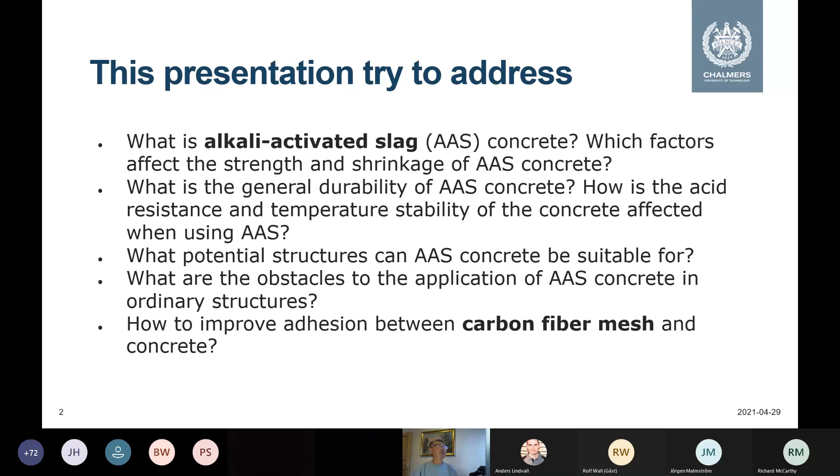So this is my outline of presentation today. First, we will look at the background. What is alkali-activated slag concrete?

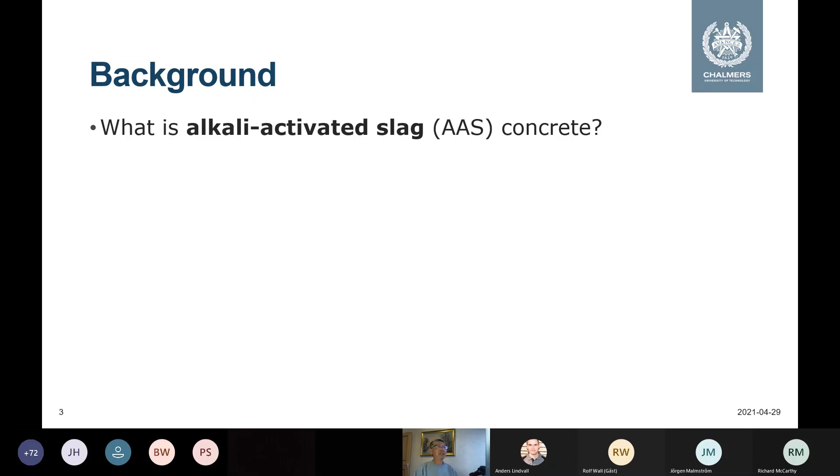In fact, we know that we have a problem with the carbon footprint in production of Portland cement. In our concrete, we have to use Portland cement, so that means we have to reduce the carbon footprint. This is our task in the near future.

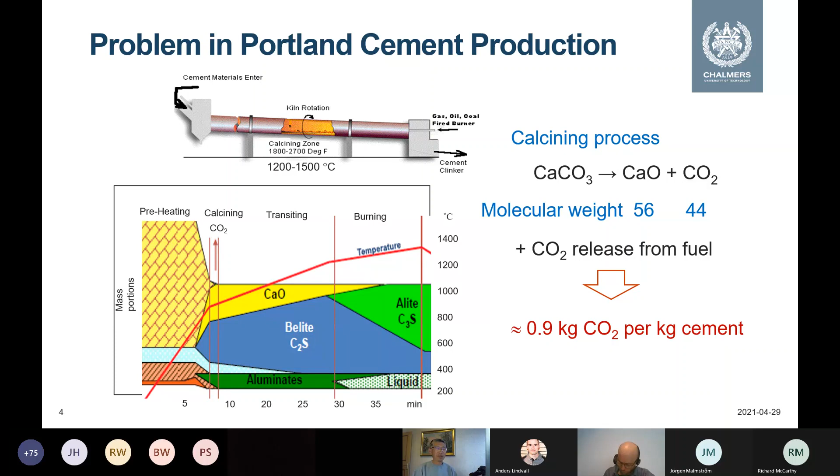In fact, alkali-activated materials historically, even from 1930, in Germany they have already started some alkali-activated slag. In the 50s, in the previous Soviet Union, they systematically studied alkali-activated slag. In France, in the 80s, they studied some geopolymer.

I think that is just a different mineral. When we use slag, that is alkali-activated slag, but when we use fly ash, that is geopolymer. So this is similar - in fact it also belongs to alkali-activated materials.

In Sweden, our Chalmers' first PhD student from building materials studied alkali-activated slag, by Tomas Kutti. I think he was Thomas Concrete Group's first manager of research and development. I think all of you know him. He is now 75 years old, but he contributed very much to alkali-activated slag.

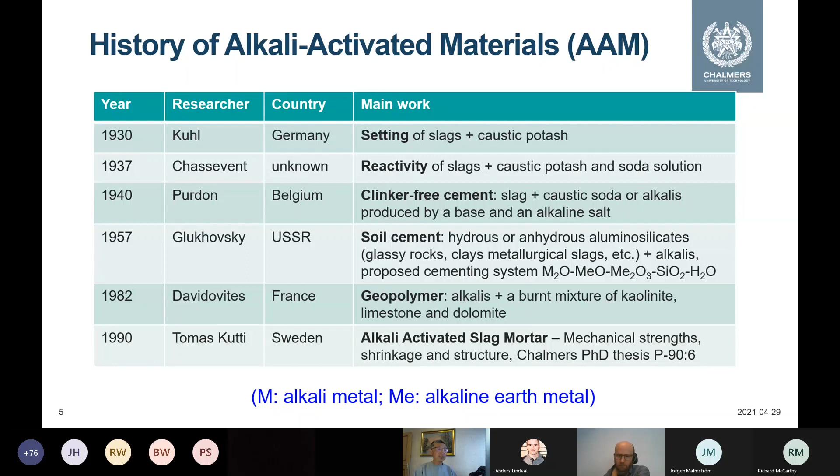After the year 2000, this became a very hot topic. You can see that after 2000 we already have 3 books about alkali-activated cement and concrete, or alkali-activated materials, and we even have a handbook of alkali-activated cement, mortar, and concrete.

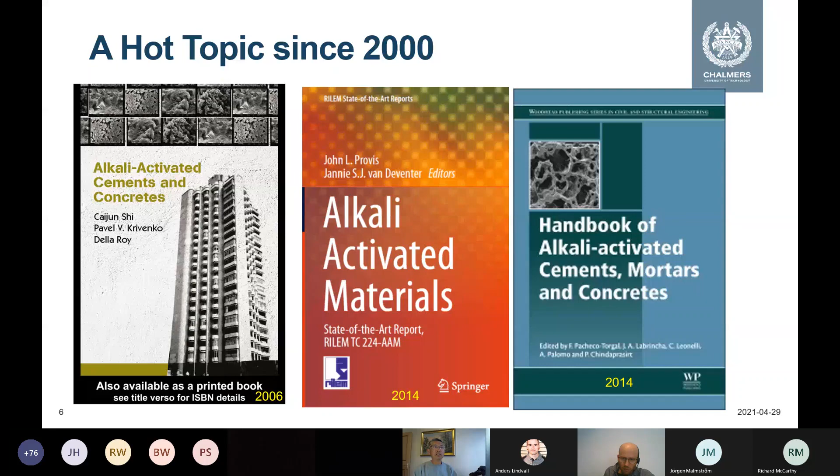There are also a number of buildings, in previous Russia or Ukraine, and in China - they already have buildings, but not yet in Western countries so far.

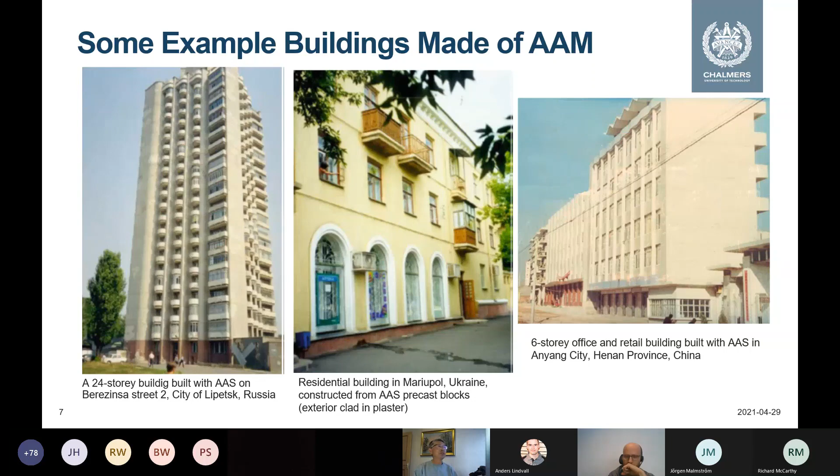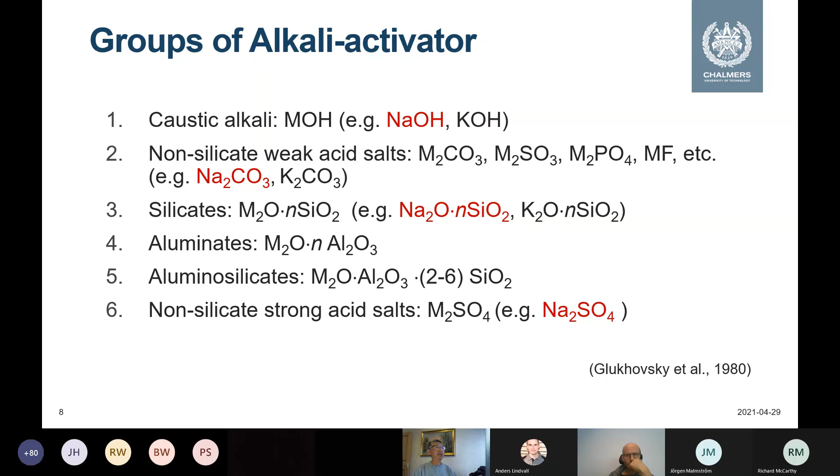I think that is also a relatively low carbon footprint. But the first problem is high shrinkage because of the low calcium-silicate ratio. And the second problem is the setting time. But nowadays I think we can control the setting time quite well, so I think the second is not a problem, but the first one is still a problem.

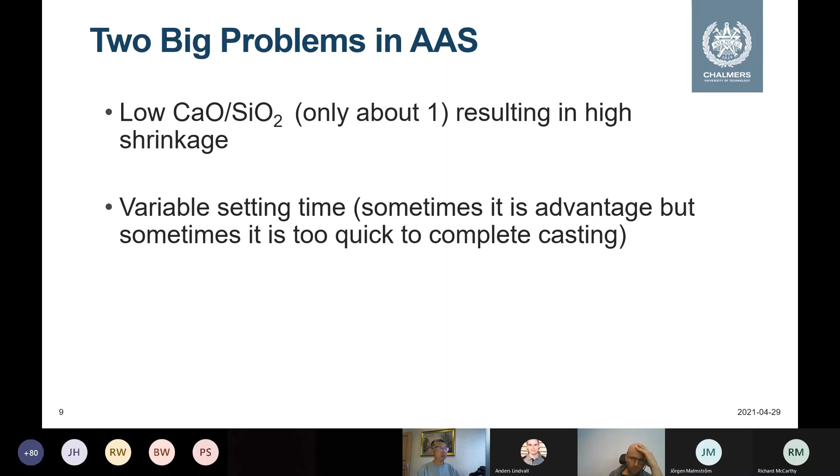This is the reason why we started a project with financial support from Vinnova in the past years. This year we finished the project, so this is why I want to present the results as a kind of implementation.

In this project, Chalmers is the leader. We have cooperators from Swerea, now RISE, Sicomp, and we also have a number of industrial partners in this project.

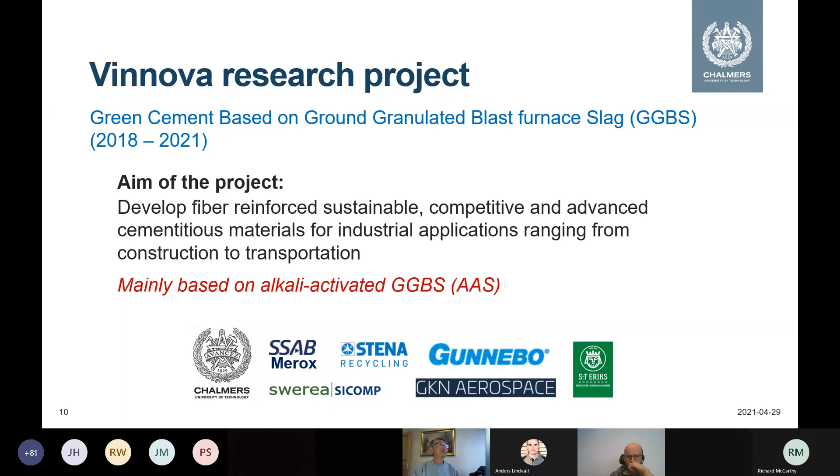Through the project, we found 3 very important parameters in proportioning of alkali-activated slag concretes. These factors include alkali content - basically sodium oxide content - and then silica content. We know that sodium oxide content is basically trying to increase the solubility of silicate.

In our slag and also cement, we have a lot of silicate, silicon oxide, but the solubility of silicon oxide is very low, so we need the alkali to dissolve it. Because this dissolution process is very slow, we need to increase the early strength. In that case we need to add silica content directly from water glass, at the molecular level. This is why we use water glass.

We also found another very important parameter: gypsum content. We use gypsum to decrease the shrinkage, and also use gypsum to increase the calcium content. So these are the double reasons for using gypsum.

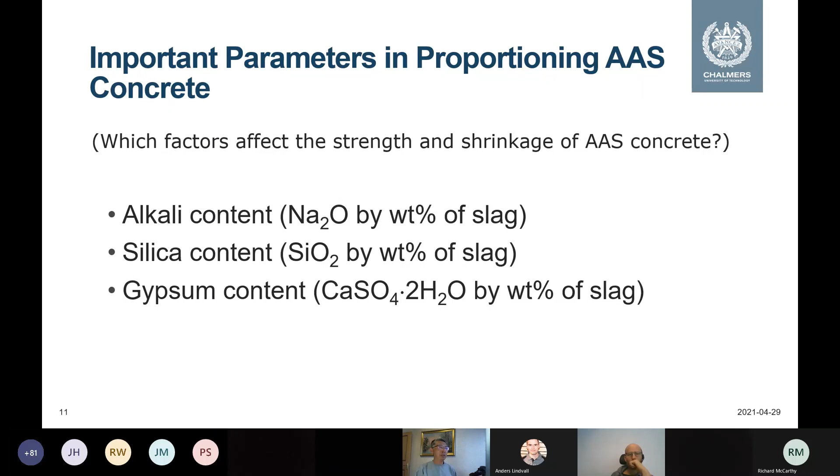So these 3 parameters we studied. You can see that by considering sodium oxide content, if we consider 4% to 6%, between this 4 and 6%, we can produce concrete more or less like ordinary Portland cement strength, compressive strength. You can see 3 days, 7 days, and 28 days, it is in this range. When we use, for instance, 5%, that exactly follows 3 days, 7 days, and 28 days. This is 90 days, also in the range. So you can see this is sodium alkali content, and on the other side, silicon oxide content or silicate content.

So you can see that if we have around 5% to 8% silicate content, at 1 day it is already here, 3 days, 7 days, 28 days, and 90 days. So you can see that if we increase the silicate content, we can increase the early strength. This is why we use both sodium content and silicate content to adjust our strength development.

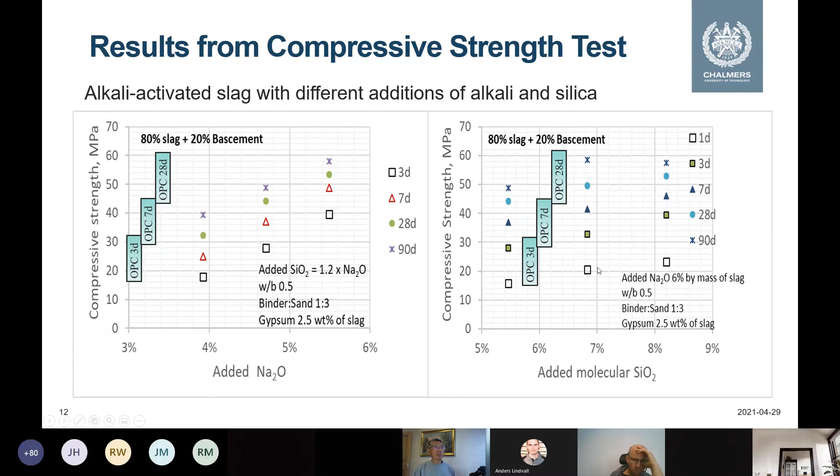Then we also found a very interesting relationship between this sodium content, silicate content, and gypsum content. This is 3 days strength, and we have a very good curve. We call it combined additions, with a very good correlation. And this is 7 days, 28 days, 90 days, and even 1 year results. You can see that the correlation is quite good.

This correlation we can express by this equation, combined addition. We take sodium content as 1, and then silicate content is 0.3, meaning the contribution to strength by silicate is only about 30% of alkali content. Gypsum is negative, about 30% negative contribution to the strength. We know gypsum has low strength, so it negatively contributes to strength, but positively contributes to shrinkage reduction. I will show later on.

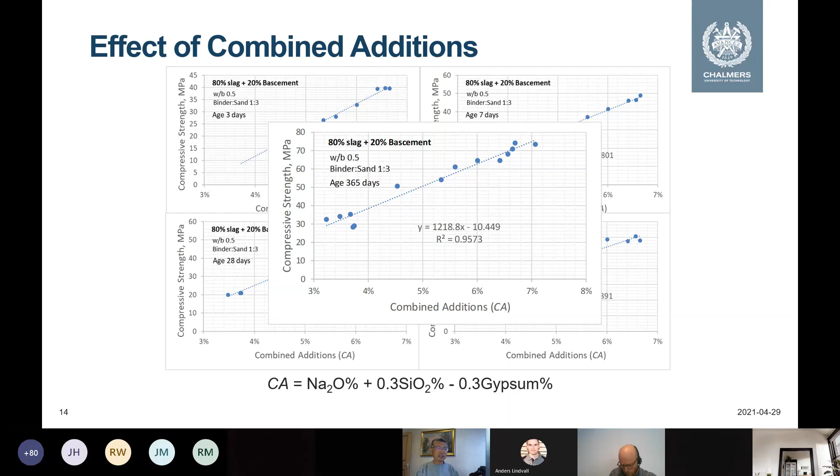So this is shrinkage. This is ordinary Portland cement shrinkage, here compared only with the mortar. I think the concrete has a similar tendency. From the mortar, you can see that ordinary Portland cement after 1 year is around 1% or 1 per mil, 0.1%. Then for pure alkali-activated slag, it is about 5 per mil. But if we...

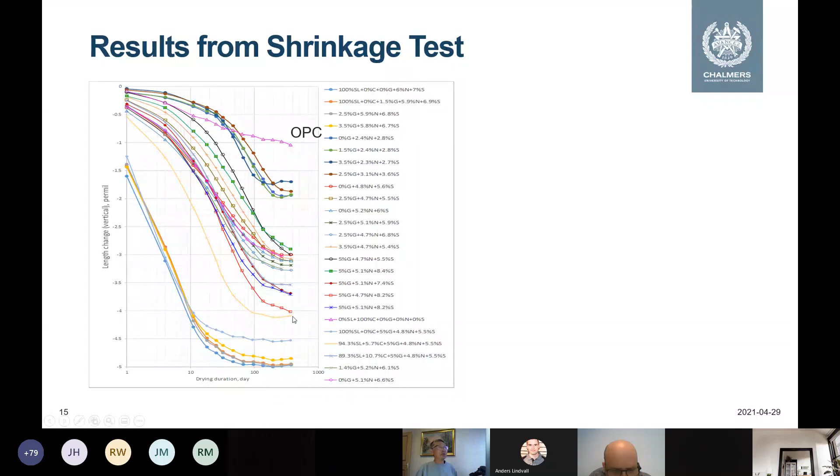Add gypsum into the alkali-activated slag, it will decrease the shrinkage. If we add cement into the alkali-activated slag, we will decrease the shrinkage even more. Here, in this range, I have some pictures. You can see this is by adding gypsum, and this is by adding Portland cement, so we reduce the shrinkage. And if we consider both Portland cement and gypsum, we can significantly reduce the shrinkage from 5 per mil to 3 per mil in this range.

This one we do not need to consider, because it is a very low alkali-activator, so the strength is low and shrinkage is also low. But here the strength is similar to Portland cement, and we reduce the shrinkage from 5 per mil to 3 per mil. Compared to Portland cement, we have about a factor of 3. But for early strength, for early shrinkage about 10 days, we can almost reach a similar level as ordinary Portland cement. So this is good for early shrinkage control.

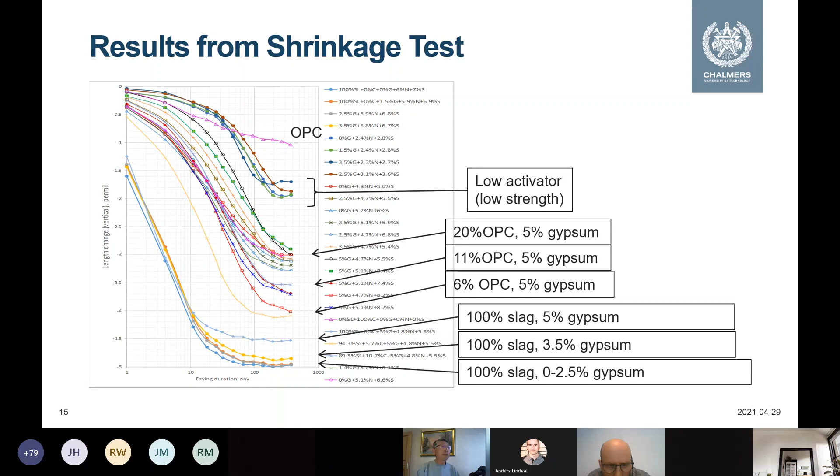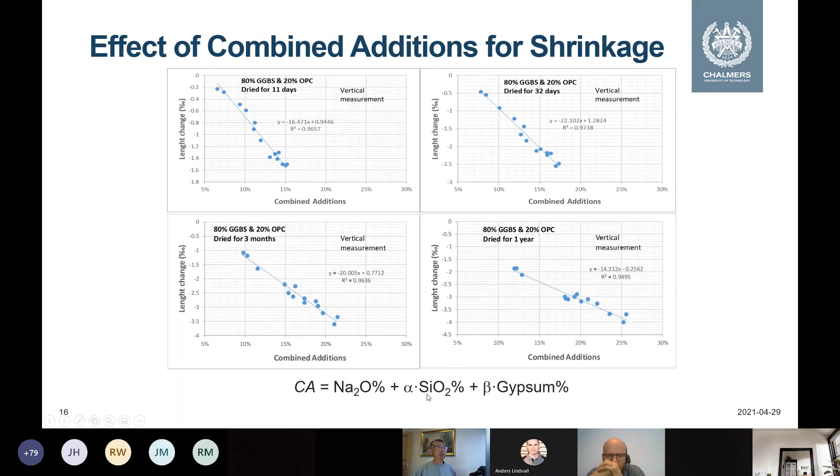Then shrinkage also follows this combined addition effect. You can see we have a good correlation between these combined additions and the factor of combined additions. But the problem is that this factor changes with age. So we summarized it this way: this is shrinkage, this is sodium content, this is silicate content, and gypsum content. Sodium negatively contributes to shrinkage at this level, but silicate contributes even more to shrinkage, much more than alkali.

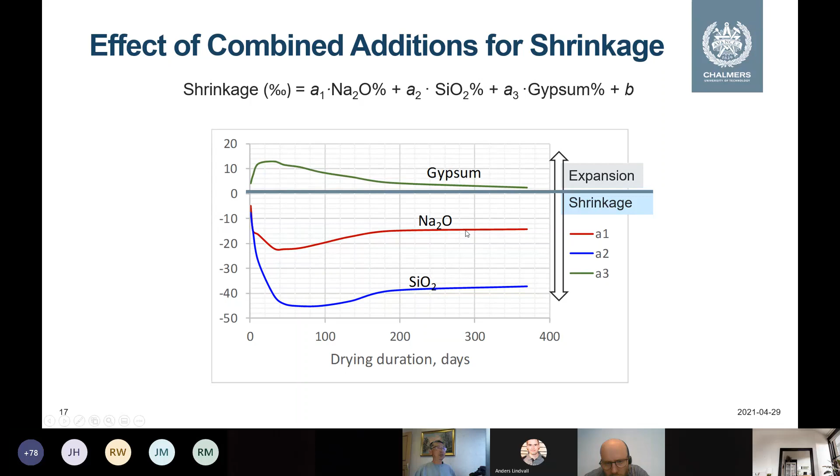Then gypsum will expand, so gypsum reduces shrinkage in another way. But the most important thing is that this only influences early age. After hundreds of days, you can see gypsum has already reduced its expansion, and sodium and silicate also become more stable. After about 200 days, we can see that sodium and silicate contribute to shrinkage in a different way.

So after our research, we suggest this proportion for alkali-activated binder: about 80% slag, 20% cement, and then about 4 to 6% sodium oxide, 4 to 8% silicate. But this is water glass, so we can adjust the water glass in this level. Then we can use water-to-binder ratio about 0.4 to 0.6 so far. If we use this proportion, we can dramatically decrease the carbon footprint for concrete production, while keeping similar strength development.

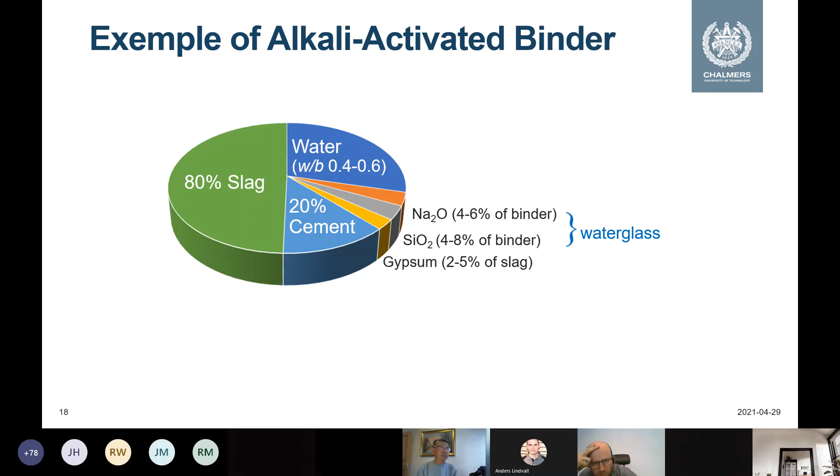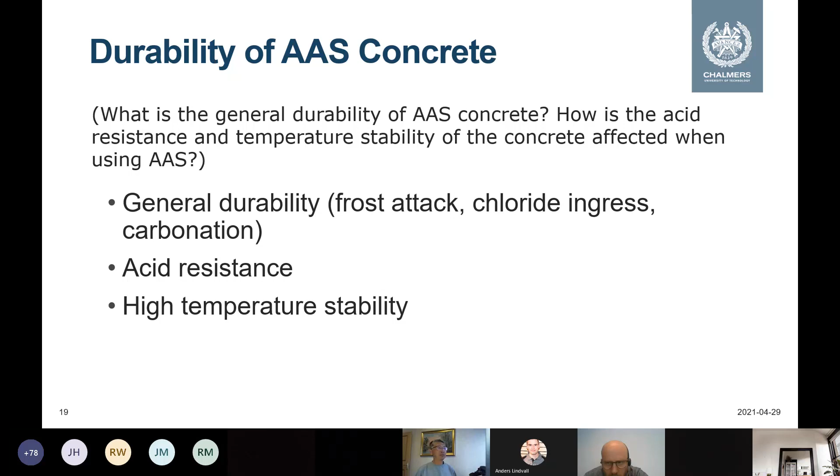So this is the advantage of alkali-activated binder. Then what is the durability of alkali-activated concrete? I want to talk about general durability: frost attack, chloride ingress, and carbonation. I will also talk about acid resistance and high temperature stability. This is different from ordinary Portland cement.

This is frost scaling. Anders Lindvall helped me to do this experiment for scaling. You can say this is a non-air entrained concrete. The scaling quantity is about 1.5 to 2 kilo per square meter.

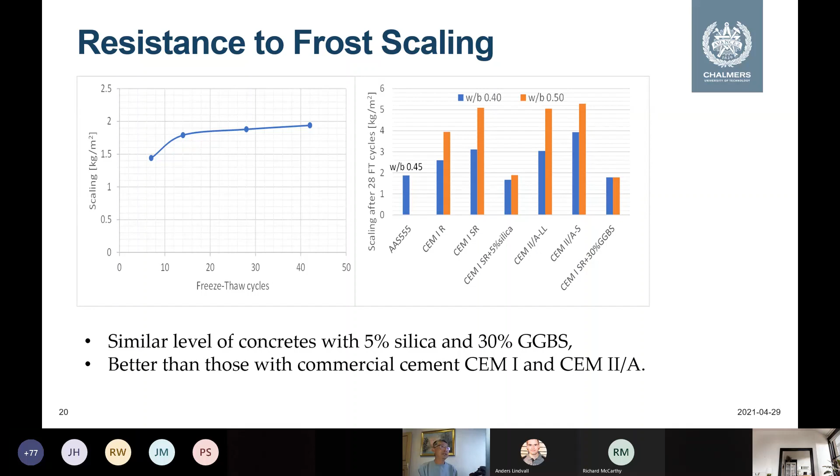But then for chloride ingress, you can see this is alkali-activated concrete, this is ordinary Portland cement, then slag at 20%, 30%, 40%, 60%, and this is 20% fly ash. You can see that this is 80% slag, and it dramatically decreases compared with the 60% slag. So we can see that the chloride ingress resistance is much better with alkali-activated binder.

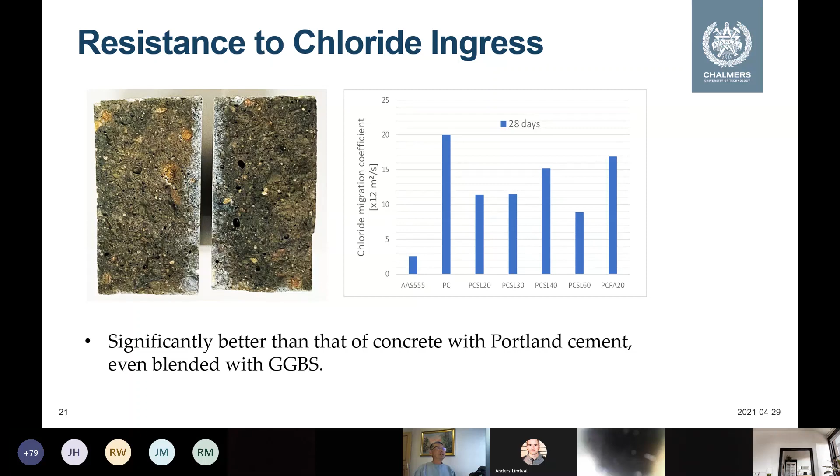I think the main reason is that we lack portlandite, which is the usual buffer against carbonation.

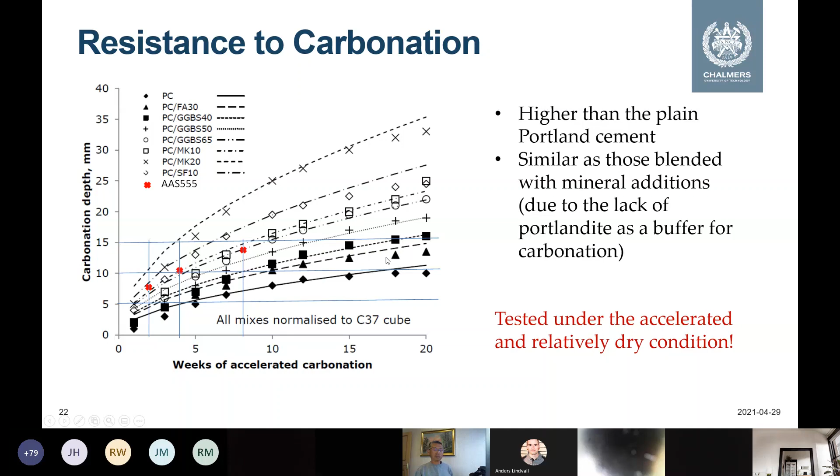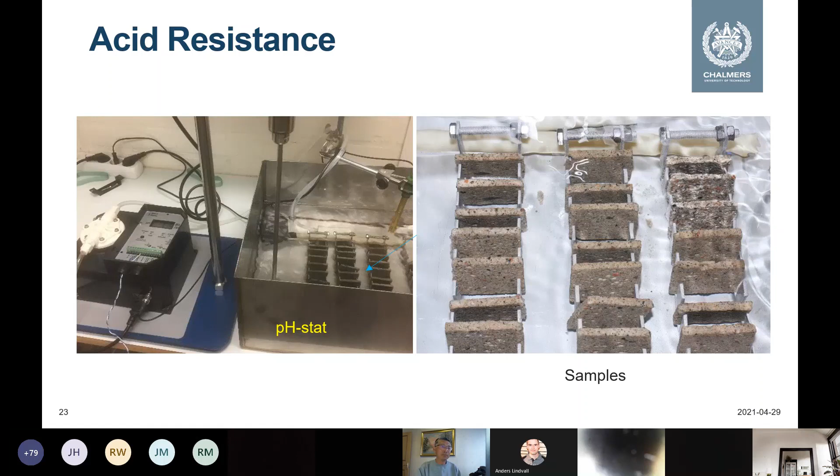Then we got this Portland cement without weight loss. We found that the Portland cement surface contained so many white deposits - I believe that is gypsum. This gypsum will absorb water, which is why we could not measure the decrease of weight. But when we decreased the pH to 2.5, then we got a dramatic increase of weight loss by Portland cement. The reason is that this lower pH dissolved the gypsum.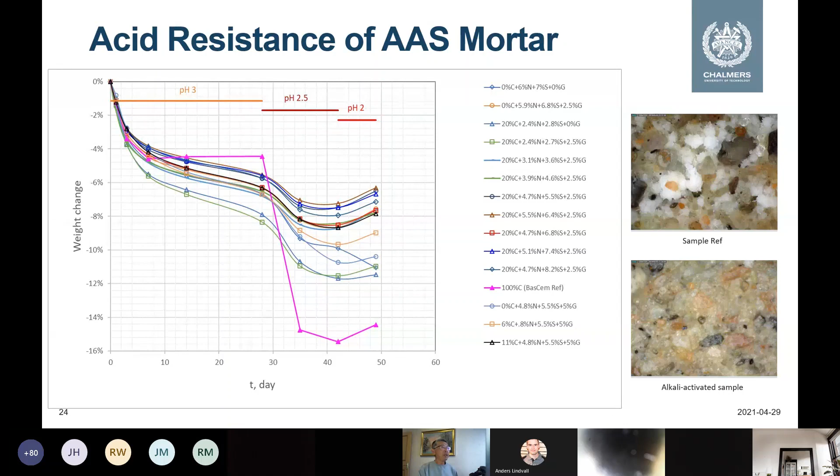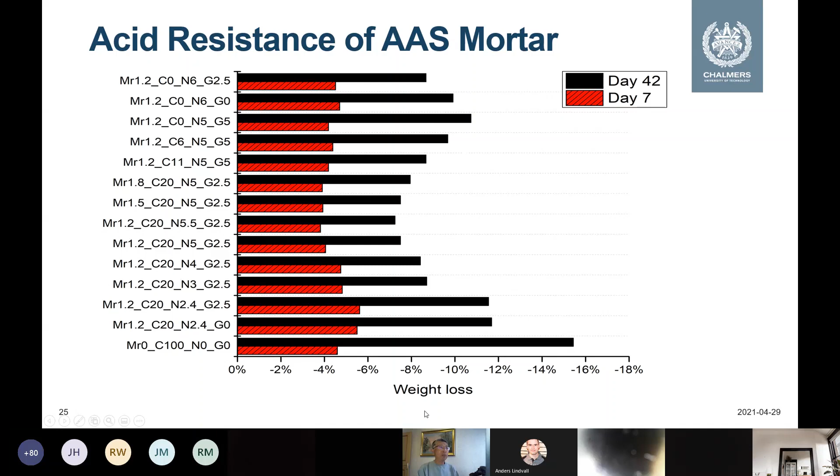So then we can say that in this case, all of the alkali-activated mortar in fact has less weight loss compared with Portland cement, meaning we have better resistance to acid. So this is for mortar specimens. Later on, we considered this may not reflect the real situation. This is Portland cement - all of the alkali-activated mortar has lower weight loss. But in this way, it is not so good.

So we tried to test concrete. For concrete, you can see we directly put it at a lower pH. Based on our previous experience, we directly used pH 2.5. After 1 month, we found that the weight loss was not enough, just 1%. So we decreased the pH to 2. After 1 month more - so 2 months total - under this pH between 2 and 2.5, we got this strength.

We directly measured the strength. You can see that after 2 months for alkali-activated concretes, there is almost no strength loss - it keeps similar strength. But for ordinary concretes, the strength already decreased. This is for high strength Portland cements, this is for low strength Portland cements, which I got from the literature.

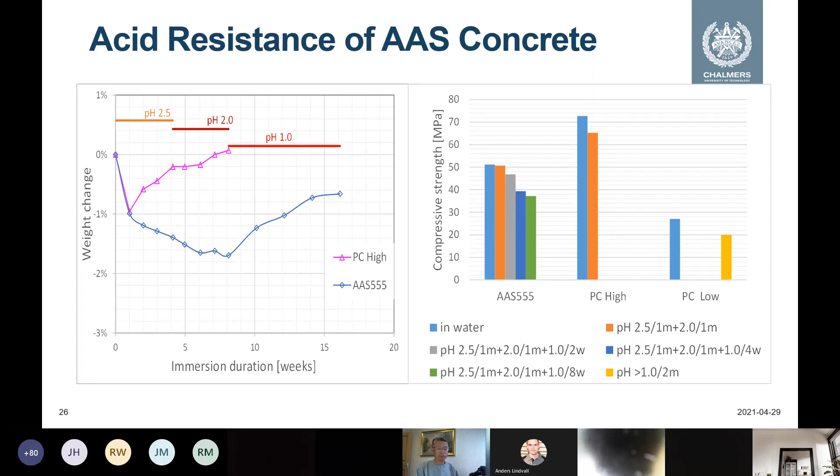So you can see that for pH 2 to 2.5, alkali-activated concrete has very good resistance to acid. But afterwards, we decreased the pH to 1, which is very strong, 0.1 molar acid. In this case, the strength decreased. So you can see that the acid resistance is limited - it is only good for pH 2 and above. If the pH is lower than 1, the concrete will become damaged. We cannot avoid this, because our concrete always has alkali content, so it cannot really stand against acid. But anyway, for pH 2, that is good enough.

For fire resistance, that is a little bit different. Let me say, this is Portland cement, 100% cement, tested at 350, 550, and 800 degrees. After 800, the residual strength for Portland cement is about 80 - no, this is wrong, this is at 350.

For ordinary Portland cement, strength is about 80, but after 800 degrees, the residual strength is about 30. For alkali-activated concrete, after 350 degrees, the residual strength is higher than Portland cement. After 550 degrees, alkali-activated concrete is still higher than Portland cement. But after 800 degrees, it is lower than Portland cement.

The reason is that after 800 degrees, everything in the cement materials has been destroyed, including CSH. But at 550 degrees, only the Portlandite is destroyed. For alkali-activated concrete, we have less Portlandite, which is why it has better stability to high temperature, up to 550 degrees. If it is higher than 800 degrees, it's not good enough.

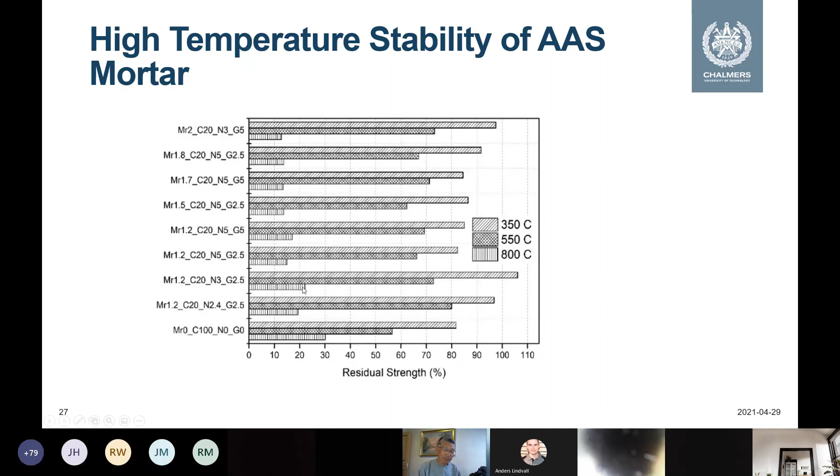We also tested with Gunnebo AB company. They produce safety chambers, and they tested our alkali-activated concrete. You can see this curve. Their requirement is that it should hold 2 hours under 200 degrees in the center of the specimen.

If the concrete can keep 2 hours under 200 degrees, we think that is good enough for fire resistance. In this case, 2 hours gives us the chance to save our material, according to their definition. We tested two types of concrete: alkali-activated ordinary concrete with strength over 50 megapascal, and another lightweight concrete with vermiculite as an aggregate.

In this case, we got a very good curve. You can see that under 200 degrees, it is more than 3 hours, which is very good for fire stability. In my opinion, if we combine these two concretes, we will get very good fire resistance.

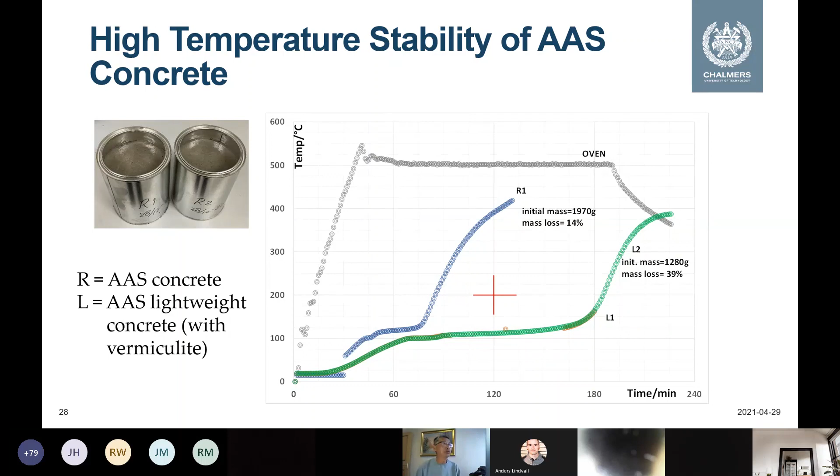So what are the potential applications for this type of alkali-activated concrete? In my opinion, for sewage pipes, where we have acids around pH 3, this type of concrete should have very good resistance to the acids.

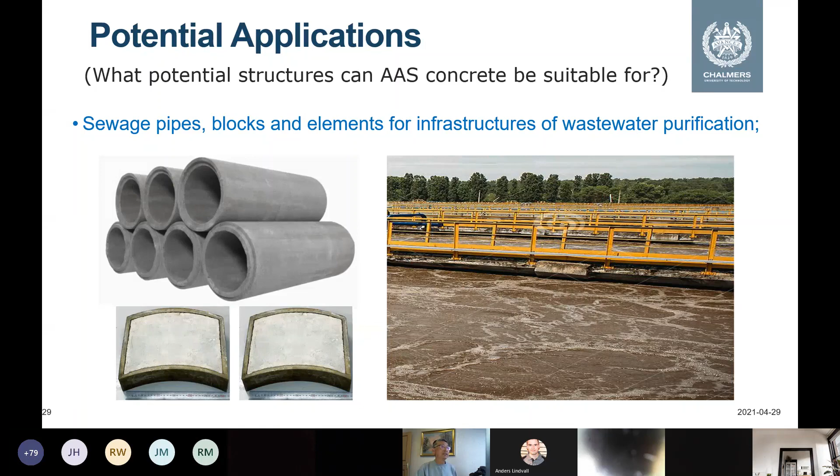We can also produce blocks and elements for infrastructure for wastewater purification. This wastewater normally contains sulfuric acids around pH 3. For ordinary concrete, it becomes corroded and damaged, but if we use alkali-activated concrete, it can hold much longer. This is one of the potential applications.

Another potential application is fire resistance walls or beams. If we produce it as a sandwich structure with strong concrete on both sides and fire-resistant lightweight aggregates in the middle, we can resist fire up to 3 hours. That gives us the chance to save documents. I heard that after 200 degrees documents will catch fire, so if we have 3 hours to transfer the documents, that should be good enough. This is the second application.

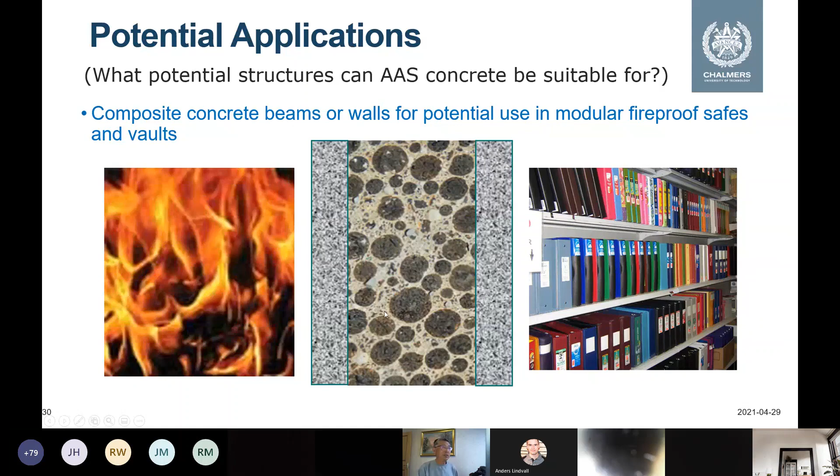The third application is a little bit special. Recently we had another project about crushed concrete recycled aggregates with very fine particles. We know that even for crushed rock, fine powders less than 2 millimeters are very difficult to use in concrete. So how can we do it?

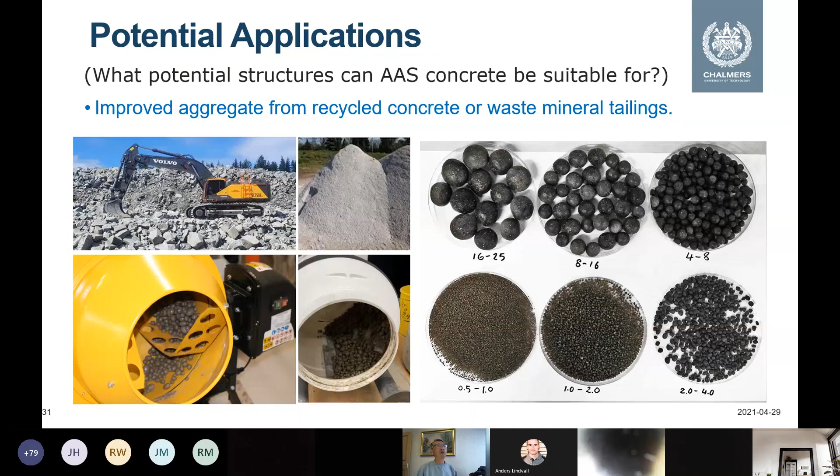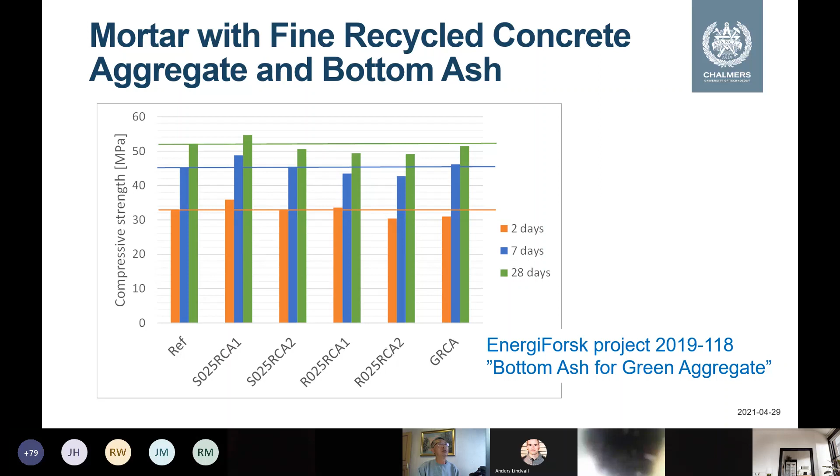This is also just using slag with recycled concrete aggregates, and you can see it's more or less similar. So we can use this technique to improve our aggregates in concrete production. That is also one way to utilize recycled material and reduce the carbon footprint.

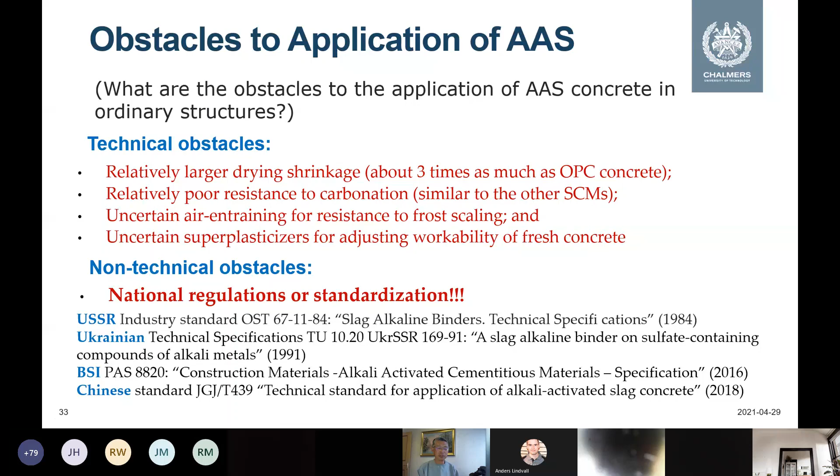Now I want to take a few minutes, about 5 or 10 minutes, about this carbon fiber mesh from China. I asked Thomas Concrete Group why they do not use carbon fiber, and I think the big reason is that the bonding between carbon fiber and concrete is poor, so we cannot really utilize the carbon fiber.

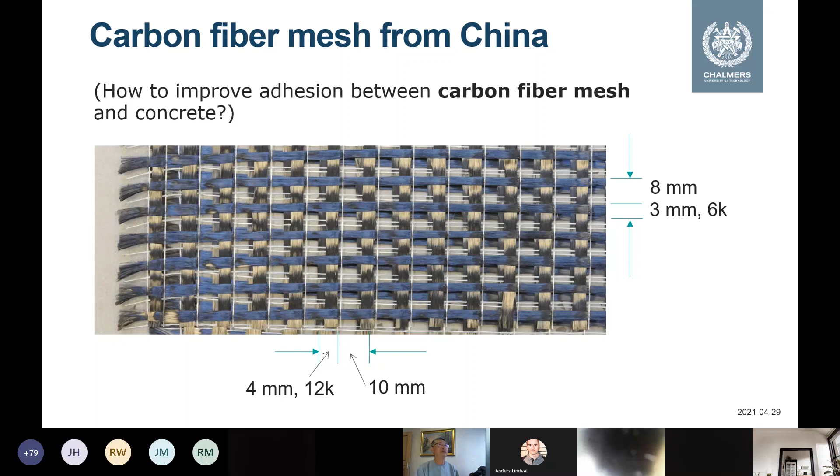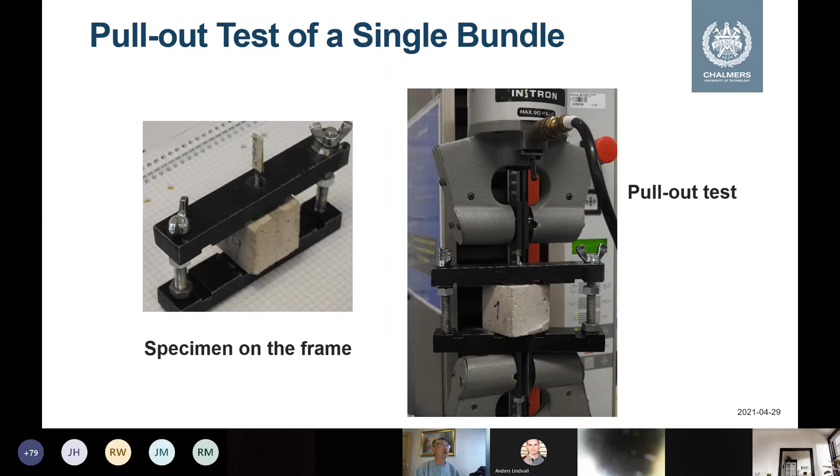So we developed a test to improve this bonding through nano impregnation. After nano impregnation, I will show you this single pull-out test. You can see that after this pull-out test, the fiber either becomes broken or pulls out, but very difficultly pulls out.

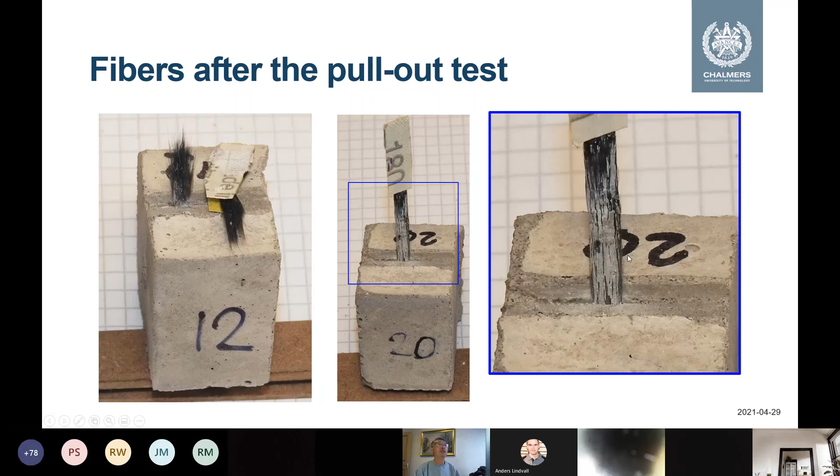So this is the curve. You can see the pull out - this red one is the ordinary fiber without treatment, without nano treatment. But the nano impregnated fiber shows much higher pull out strength and also a much longer displacement. This is an indication of very good bonding.

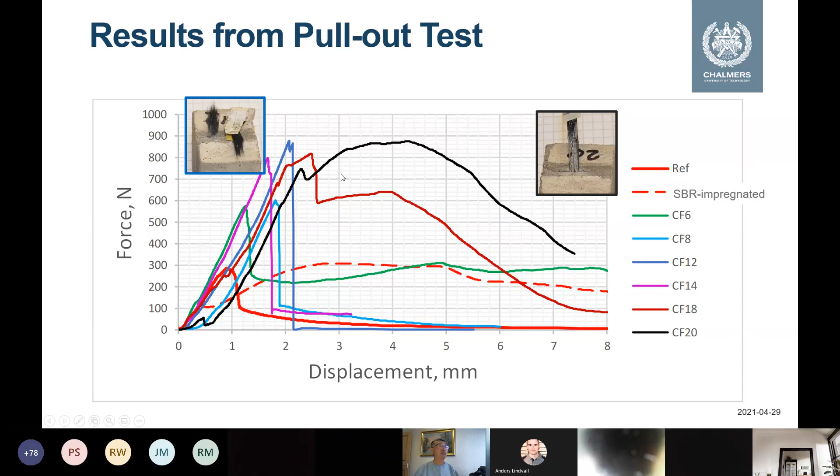This one is a commercially available kind of SBR rubber impregnated fiber, but our nano carbon fiber is still much better than this commercial one. So you can see that the pull out force is increased by 2 or 3 times.

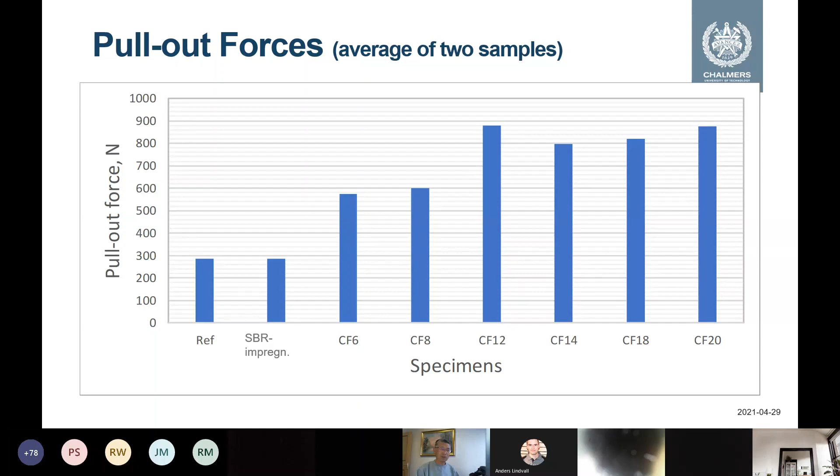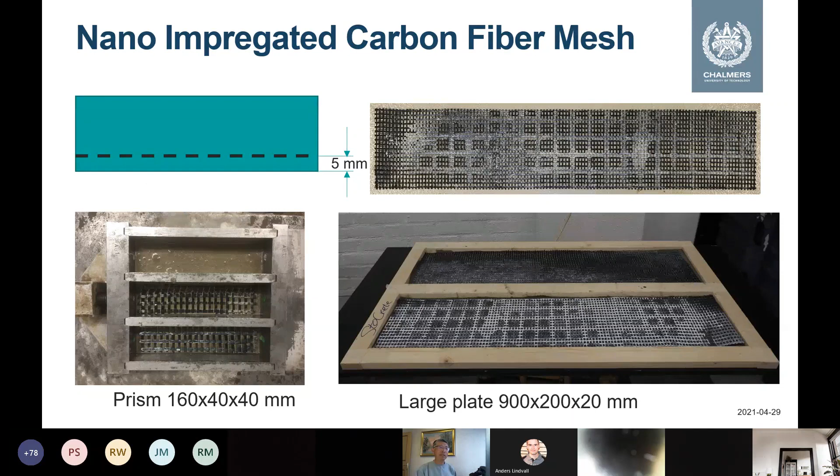Then we tested the concrete with this nano impregnated carbon fiber, doing a small test and large plates. Here are the results. You can see that without fiber, the concrete just becomes broken as usual. With the fiber, original fiber without treatment impregnation...

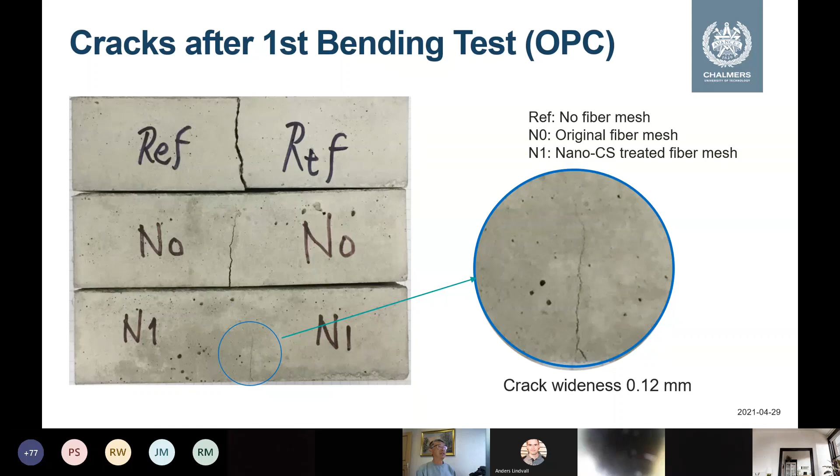After one bending, it becomes cracked. But for the nano impregnated fiber, you can see that the crack is just 0.1 millimeter, much finer than the non-impregnated one. Then the results show this reference broken strength, flexural strength, but this is without treatment by carbon fiber.

After 3 bendings, it becomes broken. This is the nano impregnated fiber - after 11 bendings, it becomes broken.

But the crack becomes 3.5 millimeter wide, which means very strong, very high ductility.

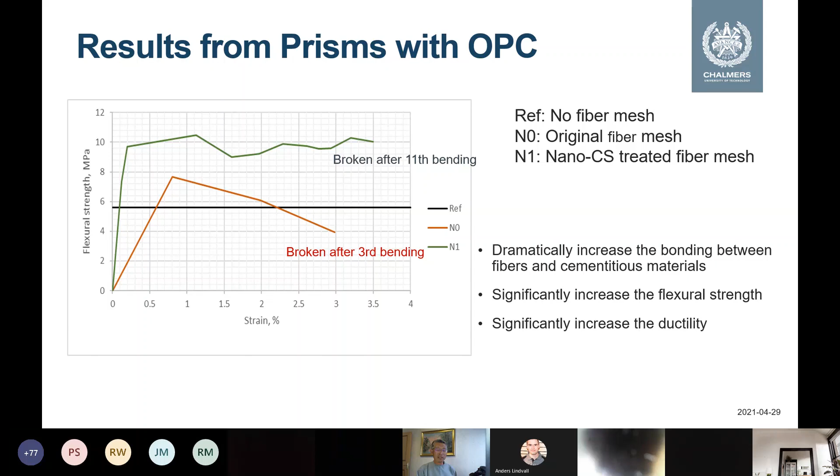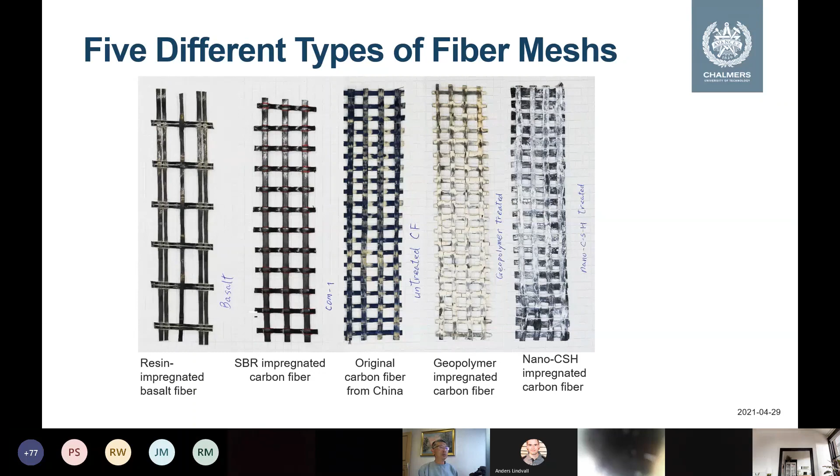Then we tested different industrial fibers in this project - this is just the casting of the fiber, and then this is testing. We used our three-point bending test. Here are the results.

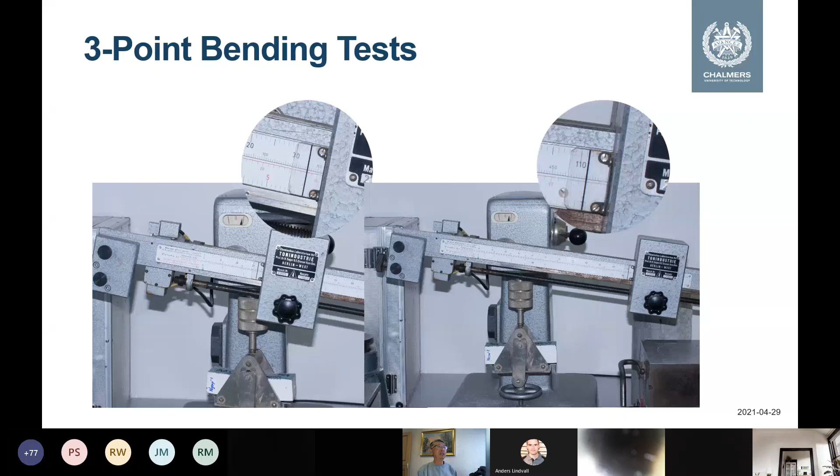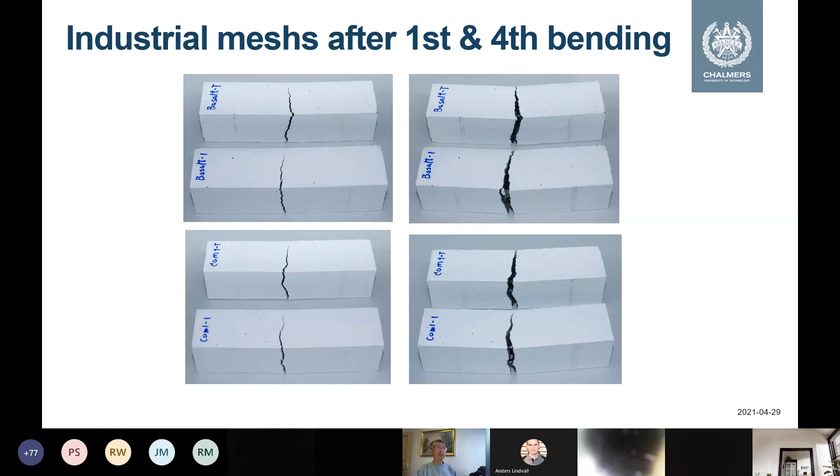You can see that for basalt fiber, after the first and fourth bending, it becomes broken. This is a commercial rubber impregnated fiber, also after fourth bending it becomes broken. Then this is our non-impregnated carbon fiber - after fourth, it becomes broken.

Geopolymer impregnated fiber also becomes broken after fourth bending. Then the nano impregnated fiber, without breaking, lasts until the 10th loading before it becomes broken.

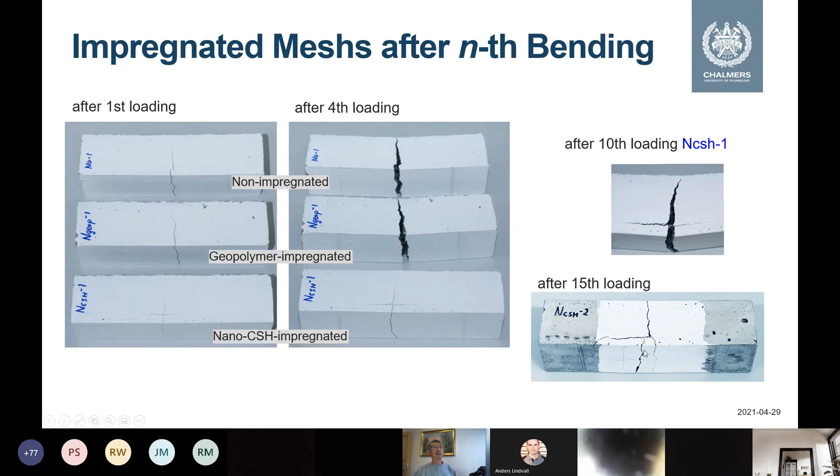This is at 7 days, but this is at 28 days. Even after the 15th loading, it's not broken - it is still whole. Here is the result.

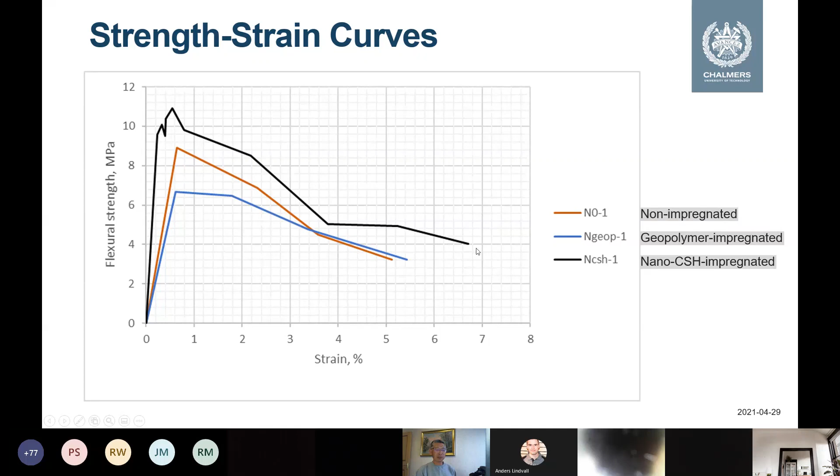You can see the curve - it can deform even more. The strain can go up to 6% strain, which is quite high.

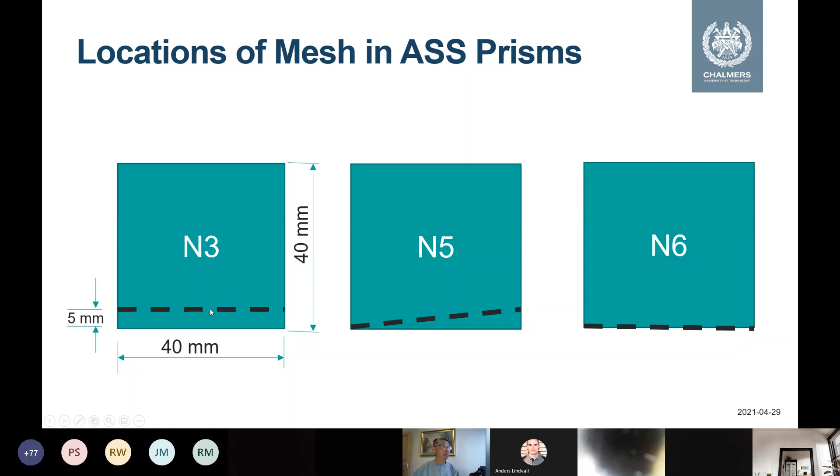And then we also tested this mesh in Alkali-activated Prism. With different positions, we have completely embedded, half embedded, and without embedded. Then we get the results.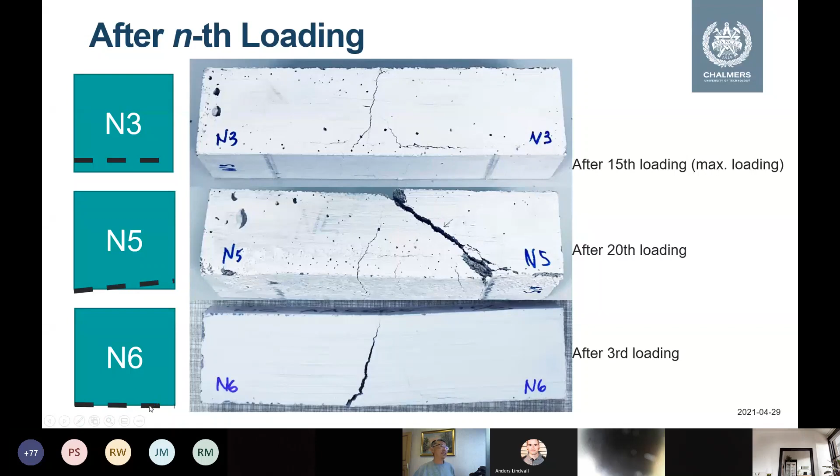Of course this becomes broken because the fiber is outside. So this is the curve - you can see the crack after maximum loading, we have about 15 megapascal tensile strength, flexural strength, and the crack is just about 0.3 millimeter. I think that is quite good.

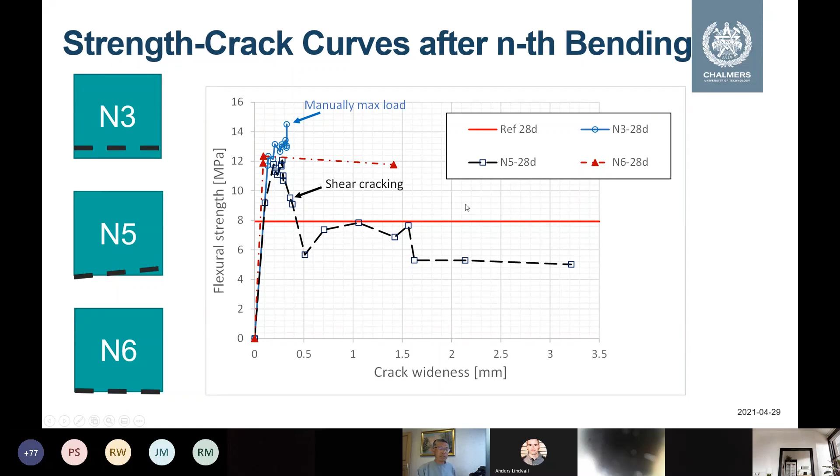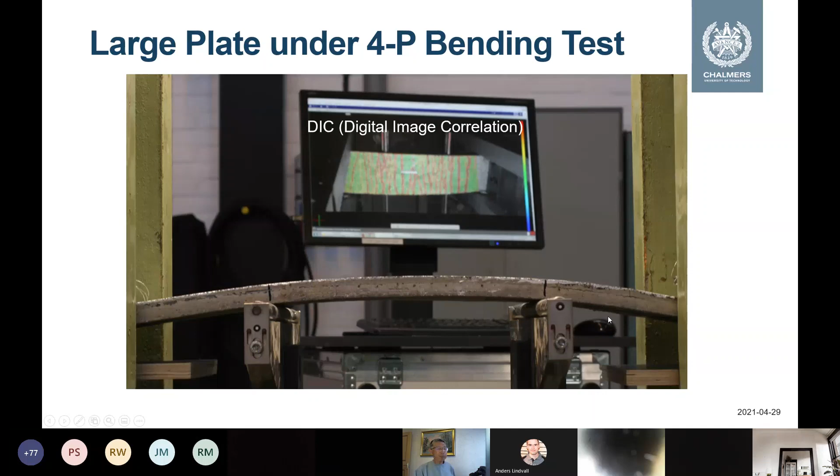We also did large plates with 4-point bending. You can see this digital image correlation - the cracks are very well distributed, and the plates become bending, about 5 centimeters. You can see it is really a bendable plate.

This is the curve. You can see that the force can be maintained up to 40 millimeters. Until 50 millimeters, it becomes broken.

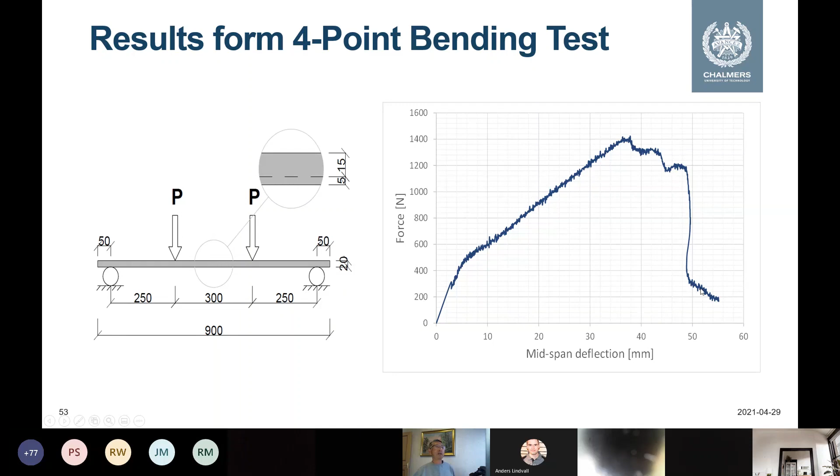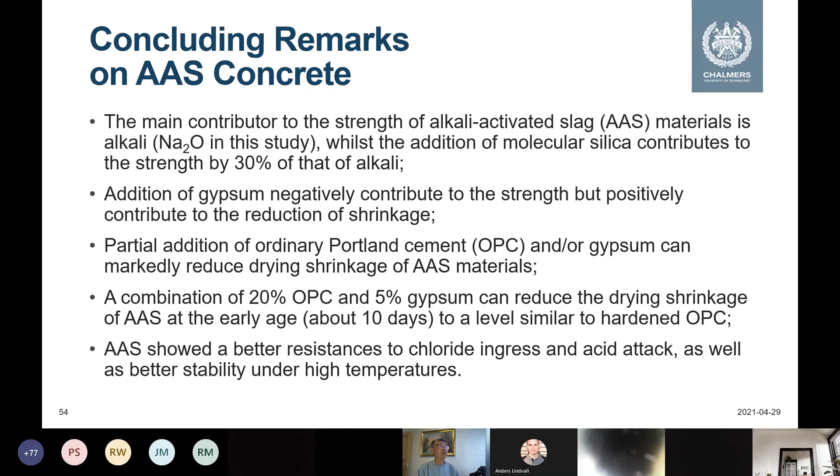So we can see that if we use this alkali-activated concrete, it can really keep similar strength as ordinary concrete, but shows better resistance to chloride ingress and acid attack, and also better stability under high temperature. So this is for alkali-activated concrete.

For nano impregnated carbon fiber, we can see that it increased the bonding with concrete by a factor of 2 or 3 times. And the concrete reinforced by nano impregnated carbon fiber mesh reveals very good loading capacity with shear failure, very similar to oversized steel reinforcement. So it is possible to produce bendable concrete plates with nano impregnated carbon fiber mesh.

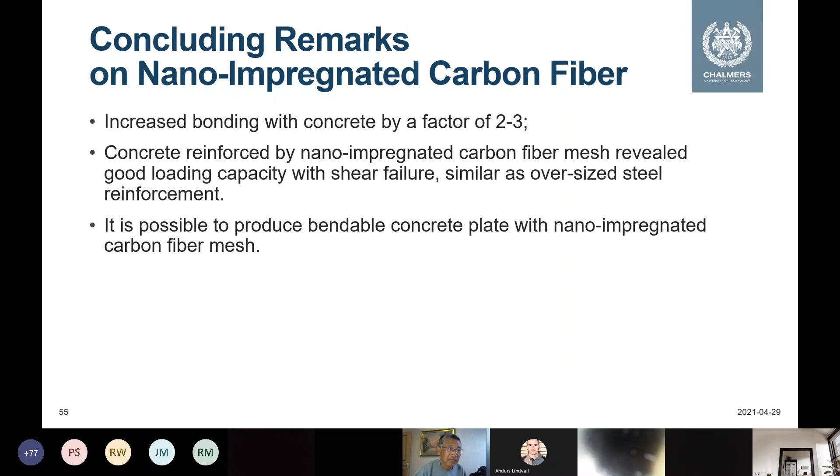So this is my presentation for all. I think it's a little bit late, about 50 minutes.